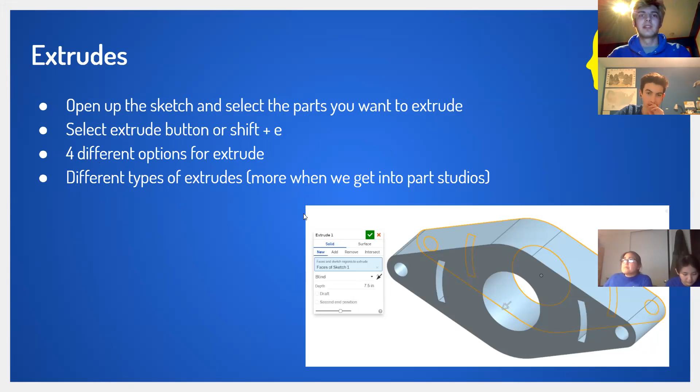So extrudes are pretty much how you turn a sketch from 2D into 3D, and it just makes it wider. That's about it. To make an extrude, you're going to open up the sketch and select the parts that you want to extrude, because you don't have to extrude the whole sketch, but I'll show you that in a second. You can select the extrude button or press Shift plus E, and there's 4 different options for the extrude, and different types of extrudes which we can get into more.

There's something in the window. That's okay, so let's make a document. Let's call it Extrudes plus Revolves, Part Studios training.

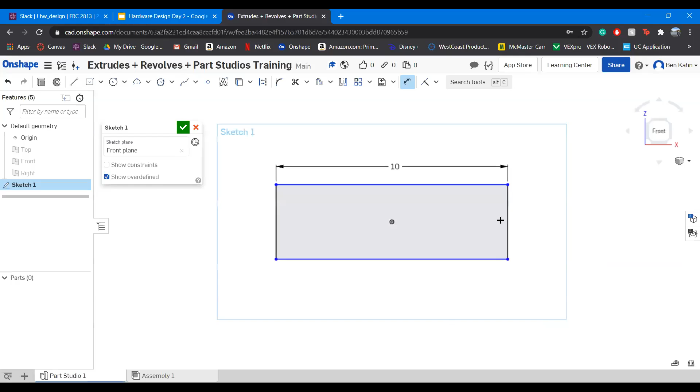So let's say we're making a sketch, and I'm gonna make that smaller so I don't have to have it covered. Let's make a rectangle and then fully define it. Let's say it's 10 by 4, and then maybe we can put a circle in the middle of it that is 3 inches in diameter.

Now that we have this very basic sketch, we can extrude it. I just did Shift E. Now if I wanted, I could also press this extrude button. Since I hadn't manually selected any parts of the sketch, it's going to just extrude what it thinks I want to extrude, which is a rectangle with a hole in it.

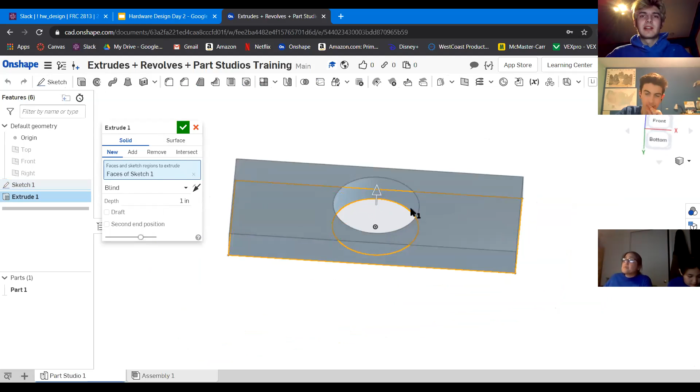So I can use this arrow to increase or decrease the thickness. You can also see the depth here. So let's say I can set this to 3 inches.

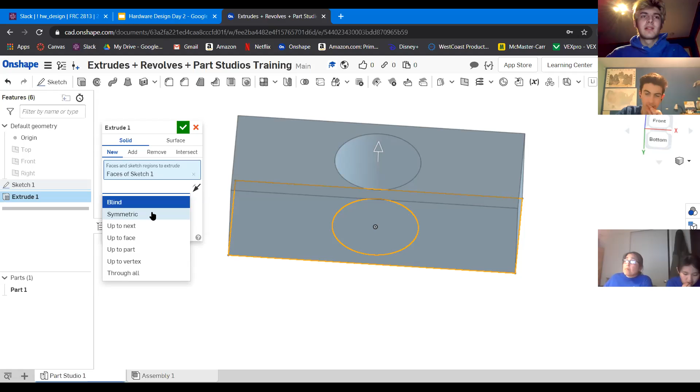And then you can go into this tab, and this can show you all the different types of extrudes that you can do. There's symmetric that you can do without a different relative position, and then up to next, up to face, up to part, up to vertex, and through all are all relative to the part studio, which I can show you. But for now, let's just leave it as blind.

Actually, let's leave it as symmetric. And then you're just going to press check, and your extrude is done.

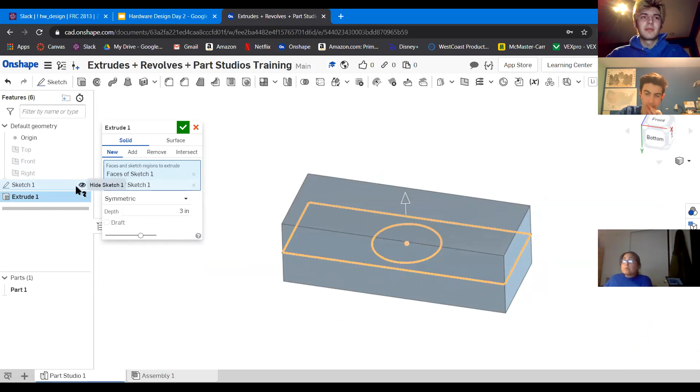Now if I wanted to have this hole filled in, I don't want it to be empty, then I can go into the extrude and change the parts that I'm extruding. Right now I can't change it because actually I can, but a lot of times when this sketch is hidden, which a lot of times it is because it automatically does that sometimes, you won't be able to change anything. So you would unhide the sketch by pressing the little eye button, and then you can deselect and select the parts that you want to extrude, sorry.

Now if I wanted to do this before, I would select that in the sketch. So you highlight the inside parts that you want to extrude, and then you can extrude it, and you can see it does something like that. And I can still make this 3 inches. And I'll change this back to symmetric.

Okay, so you might have also seen that there are these 4 different parts up here. You can have an add function, sorry, you can make a new extrude and you can add to an extrude, or you can remove from an extrude. And this intersect thing, we pretty much never use it, so don't worry about that.

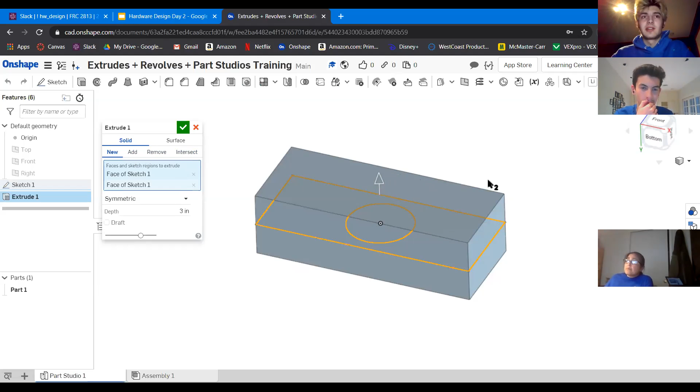So when you add to an extrude, that would be if you extruded another thing off of this, and then it would make it part of it would be the same part, but it would be a separate extrude because it can only go to 1 thickness in an extrude.

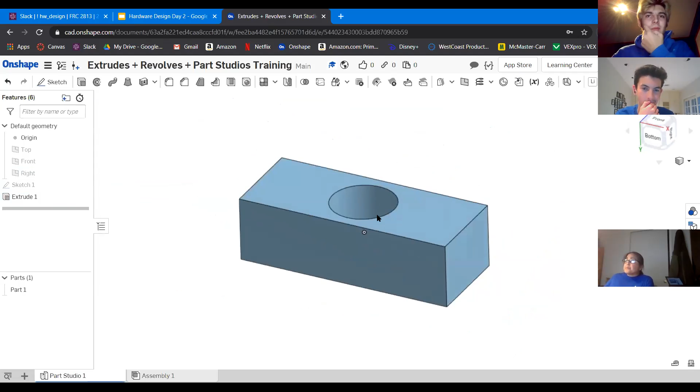I think I saw that there was a chat message. I've never used, yeah, we pretty much never use intersect. I think I learned how to do it like once and then it never worked out again. I'll just like that because I like it with the hole. Okay, cool.

Next up we have revolves. You guys care if I do this full screen? All right, so they're similar to extrudes, but the dimensions are in degrees instead of inches. It makes it go around instead of out. So you pretty much just select a face and you'll revolve around the axis.

So let's do one of those. Let's delete these. Start sketch. Oh, this is ugly.

Let's do a sphere like I had in the slides. Let's make that 6 inches, and put a vertical line down the middle.

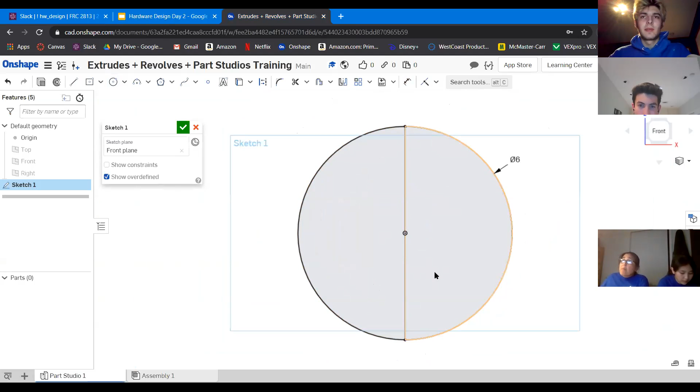Here's a trick I didn't show you last time: you can actually trim parts of the geometry with this tool, trim, which is also the M key. You can just take that off. It doesn't delete the whole circle, but just deletes the part segmented by this line, taking out parts segmented by points that occur at the end of this line. So now we have this half circle of diameter 6.

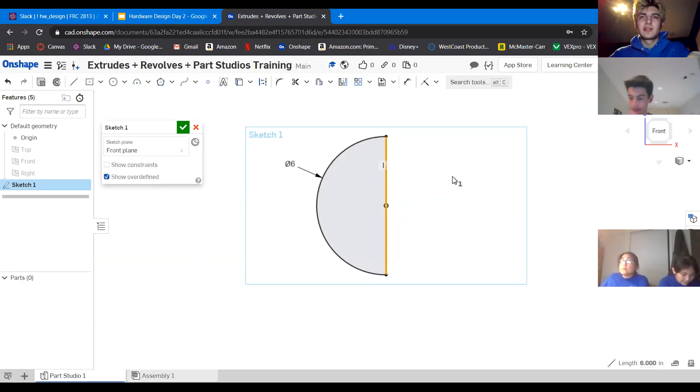And then if we want to do a revolve, there's no hotkey for it, which makes me sad, so you have to go over here and click it. It gives me an error, some red, saying I haven't told it which axis to revolve around. I've selected this face, but there's no axis, so I want to click on this box right here and select the axis I want to revolve around, which is that one right there. And it makes a sphere.

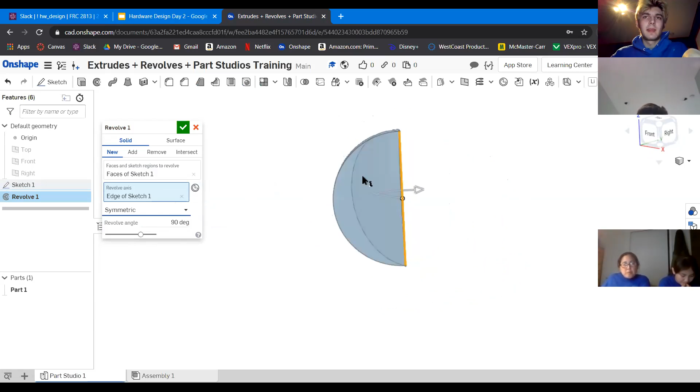But that's only because it's a full extrude right now. If I wanted it to be partial, to do it in one direction, I can change the number of degrees. So I can make it 90, or I can make it symmetric, which just means it's going to go an equal amount of degrees in both directions. There are different uses for this, mostly when you're making a part studio and you want the extrude to be different.

And then there's 2 directions, which also works for the extrude. I don't think I showed you 2 directions on the extrude, but it works the same way - you're actually going to select 2 revolve angles. So I can decrease this side, it stays the same. I have to change 2 different angles to make the shape.

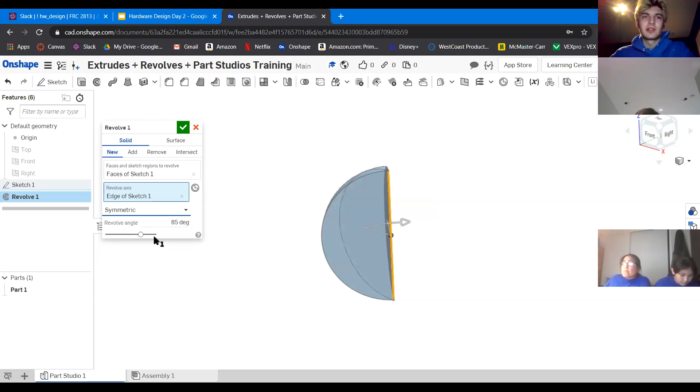But for now, let's just keep this symmetric at 90 degrees. Cool. So now we have like a quarter of a sphere that we've made with a revolve feature.

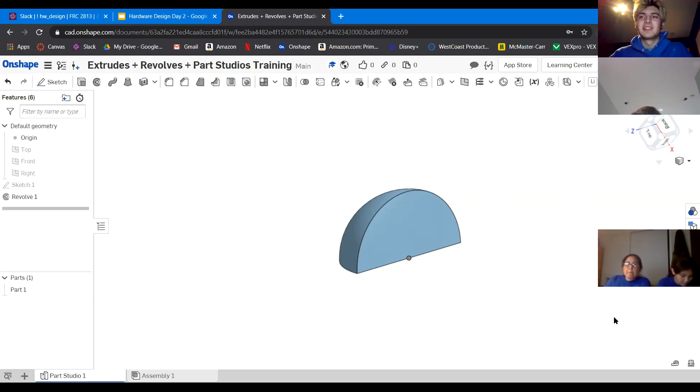All right, let's go back. So there are some tools you can use on extruded features that are already made that'll change the 3D shape of the extrude. So there's shells, which are going to clear out an area inside the extrusion to a specified thickness.

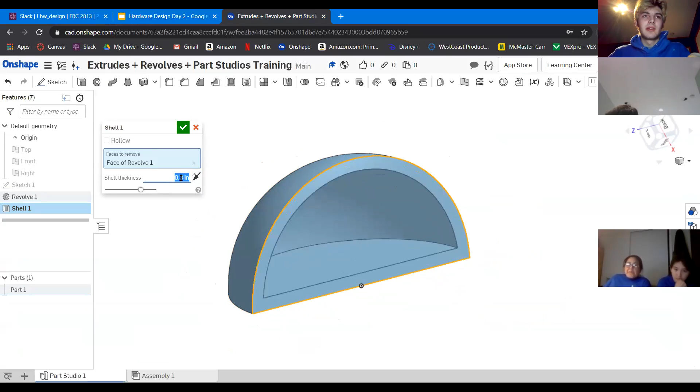So I'm going to select shell, and then faces to remove. I want to do this one. And then shell thickness, I can make bigger or smaller, just like that.

And then if I make it hollow, it actually closes this face, but the inside is still empty. So like if I did - and I haven't taught you guys this yet - a section view, and took away some of the part and hid some of the part, then it would be empty on the inside.

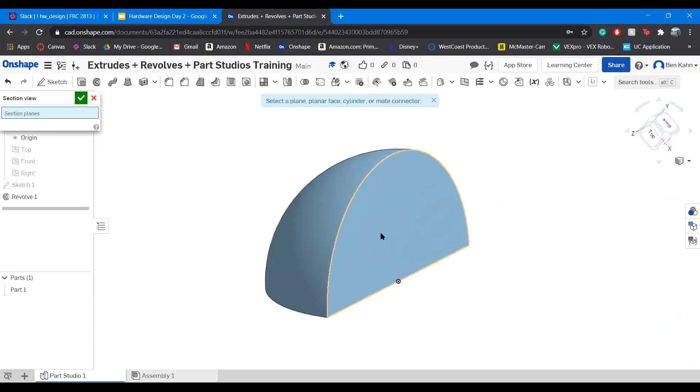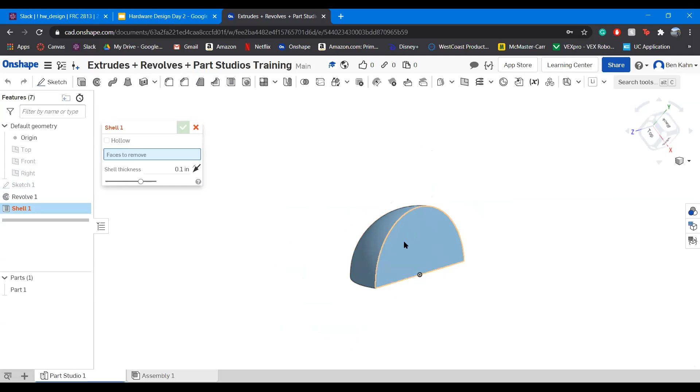Why doesn't that work? That should be here. Section view, why didn't I see that? Nice, it's acting weird, but it's fine. I'll turn this off. Oh, that's because I didn't have the shell applied. Yeah, I undid my shell.

So I'll make it hollow, hollow this part, check. Then turn on the section view. And it's in degrees for whatever reason, but that's okay. But you can see that when it's sectioned, the part is actually hollow - there's nothing inside. So the shell worked. Delete that.

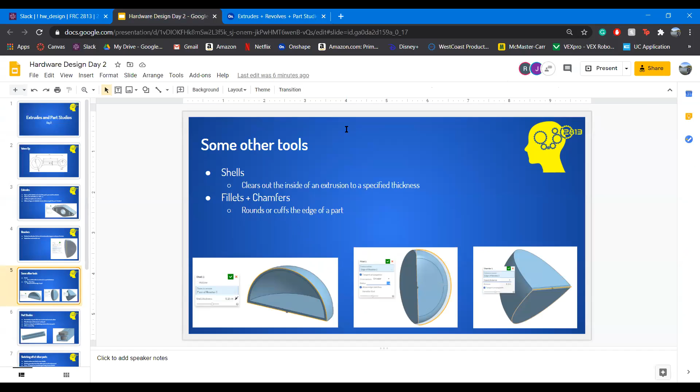There's also fillets and chamfers. It looks like it's spelled 'fillet' if you've ever taken French, and normally I would tell you to call it that because it annoys Kyle. But since he's not here, I'm just going to call it a fillet. And there's chamfers, which are very similar. I'll show you guys how to do that.

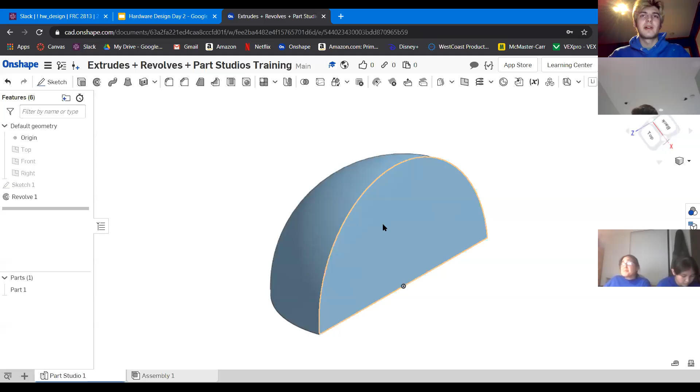So for a fillet, I've forgotten where the part is, but I usually just press Shift F. And I think it's this one, right? And then you're going to want to select the edges that you want to round, so like this one - I think it is loading.

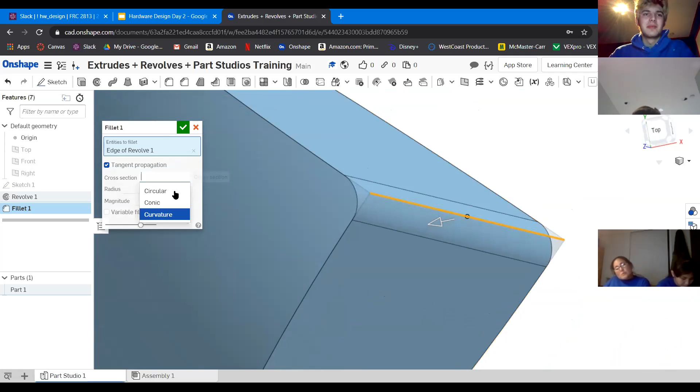You can see right here that it's rounded off the edge, and it's a circular cross section. So I can make it conic, or I can just make it curvature. We pretty much always use circular, but to understand what it means when it says circular fillet, just imagine you're taking a circle of the radius that you specify, and I can make it bigger or smaller, and you're making it tangent to these two lines, and then you're just cutting off everything outside of that. That's what the fillet is.

This whole tangent propagation thing you don't need to worry about, but that's pretty much what that looks like. A lot of times we'll do that to edges to make them rounded, which you want to do a lot because on CNC parts you can't really have sharp edges, so you're going to want to fillet it so that it can move in a curve instead.

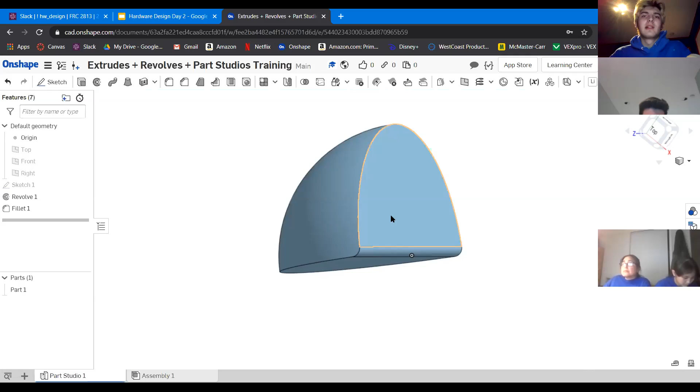A chamfer is similar, but instead of a curved edge, things tend to look better with fillets too. So instead of a curved edge, it's a flat edge. If I select this, it's just like that, a flat edge. There's a lot of different things you can edit it with, like I can change how long each of these distances are, or I can do it like a distance and a certain angle. Anything to really just make the fabrication team have a harder time doing it is all really fun, but usually we just keep it equal distance.

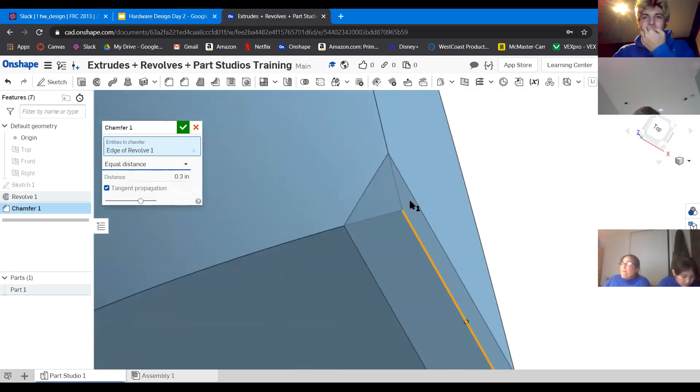So it's pretty simple. But if Caleb comes up to you and says give me a challenge, I want to make something look hard, then you can mess around with those and he'll be working on it for a while. So you guys can see how we did the chamfer right there.

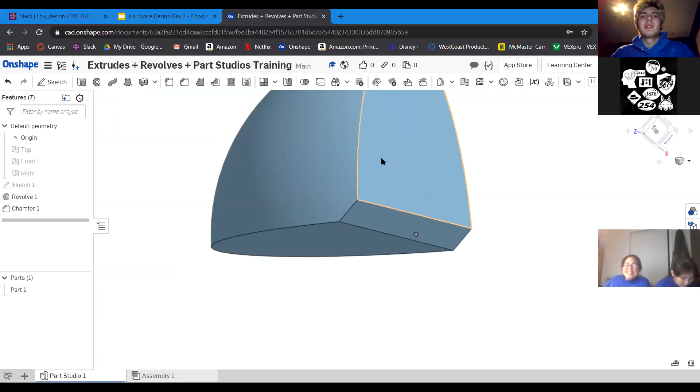Does anyone not understand it? Or does anyone want me to go over it again? Okay, you're still trying. Is everyone following along with this? Cool, that's great. Should I give you a minute to finish up, or should we move on? I think I'm going to keep going.

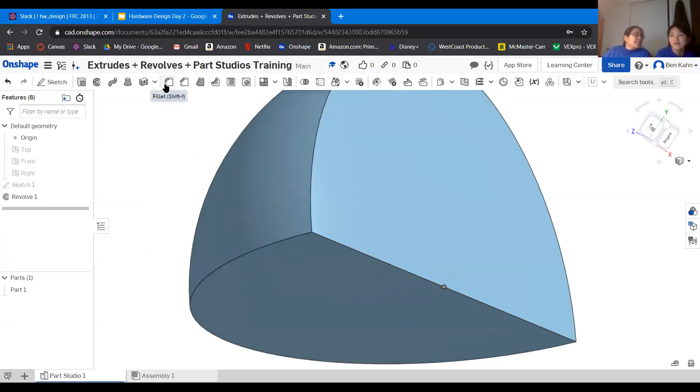A fillet or a chamfer is something to round off or dull this edge right here. It can actually be done on any of the edges, but I just wanted to do it on a flat edge to make it seem simpler. So I'll select the fillet tool. This is when I'm out of the sketch and I've already made my 3D part, and I'm going to go into entities to fillet. I can select that, I can even select this or this, but for now I'll just keep it to this because I want to round this edge.

So I'll call it circular. And when I increase the radius, the curve gets bigger, and when I decrease the radius, it gets smaller. Does that make sense now? Okay, cool. And it's the same thing with chamfers, you're just going to do it, except it's going to be flat instead of curved.

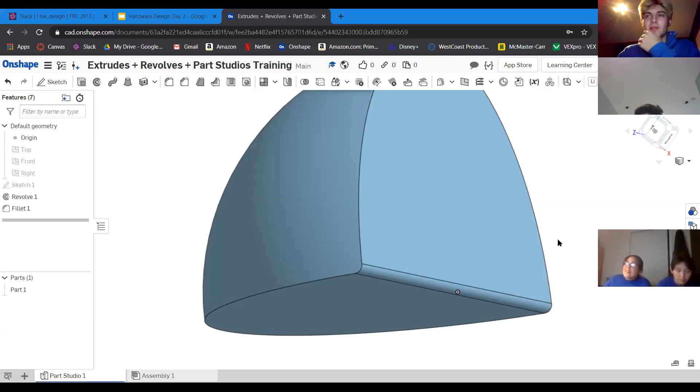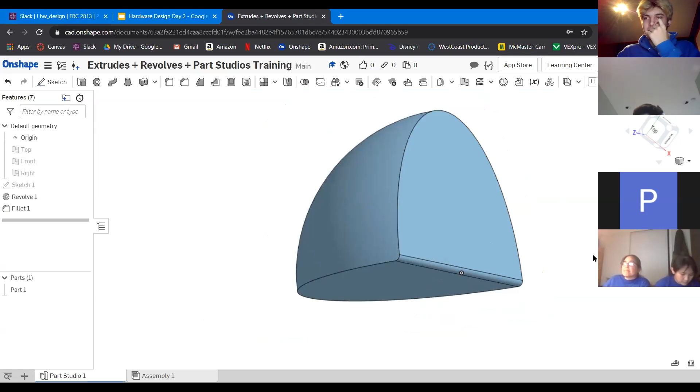Are you comfortable sharing your screen now and showing us what you're working on? If not, that's fine. How about Pranesh, do you want to show us your thing? Well, my Onshape thing's on a different computer, I could use my camera. Okay. Caleb, I'll show how to use fillets in the robot CAD later when we do the demonstration. Do you want to do that, actually? I'll stop the share so that people can pin your screen or something.

Okay wait, so what do I do, you have it on a different laptop? Yeah, on a different computer. Oh, okay, it might not work so well then. Yeah, I could bring it up on this right now. Anyone else? So I know Marcus was able to share with us last time, so I kind of wanted to get someone else. How about Joe, I haven't heard from you today, do you want to show us what you're doing with fillets and chamfers? Okay, that's fine.

What about Ashton? I would love to, except I got really lost and I'm trying to figure out how. I tried to make a circle, a sphere, and now I have a trumpet thing, so now I'm really confused. Trumpet thing. Okay, I'm not sure how you got to that, but I can show you how to make the sphere again.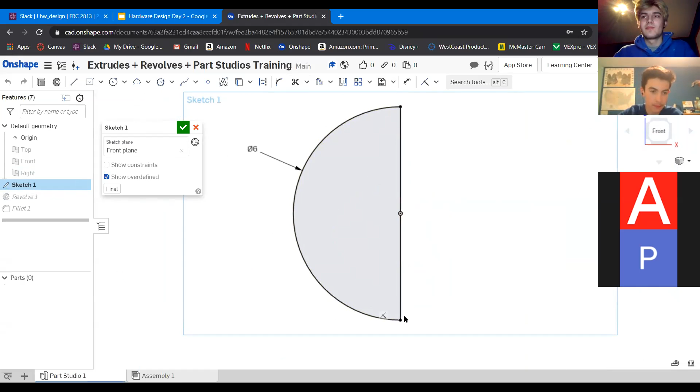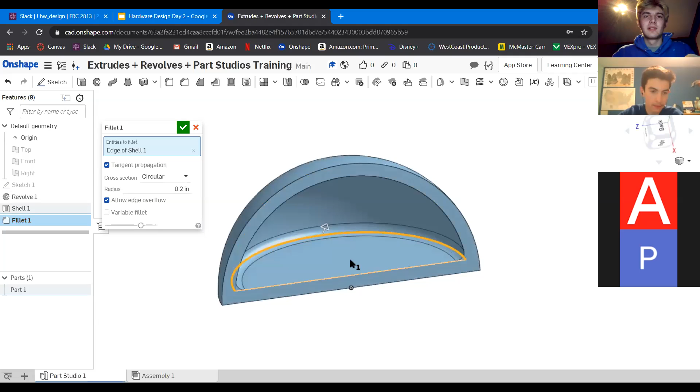And then when you go into the revolve, you just choose the face that you want to revolve, and then you choose the revolve axis, and then the type of revolve that you want to do. And then you can mix up all these things and make it really cool. So if I want to put a shell here, and then maybe I want to do like a fillet in here, that would be pretty cool, I think. So these are just the kind of things you can do when you have 3D parts.

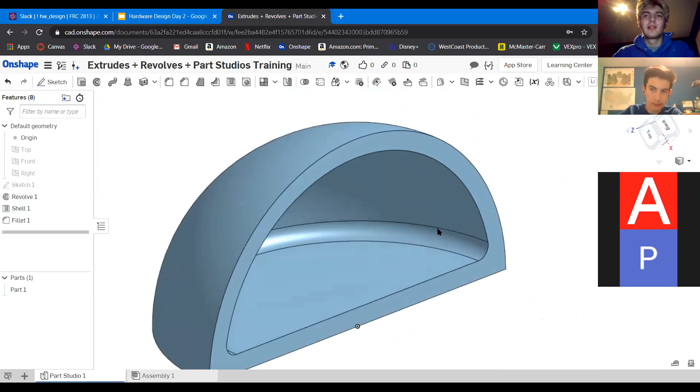All right. Ashton, are you able to do it now? Are you able to like... I'm trying. Okay, it's kind of awkward because I don't own the computer, so the settings are all messed up and funky. I see. Everything's backwards. Mm-hmm, it's crazy. Cool.

Daphne, I know can't use her mic, but I'm not sure if she can screen share. I don't know, can you, or do you want to? Daphne, you can put it in the chat if you'd like. Using a different monitor too. Yeah, that's fine. I guess we'll keep the stuff to my screen then.

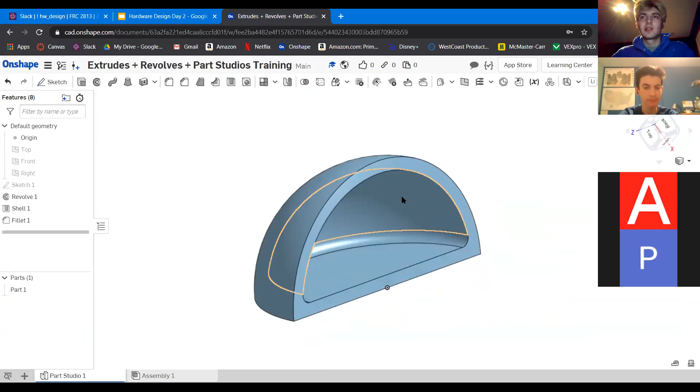All right, we can work on this a little bit more later. I think I want to move on and talk about some part studios now.

And a part studio should only contain one of each part. So in an assembly, you can take the different parts, make multiple of them, and then put them around the assembly. But in the part studio, you only want to make one of them to make sure that it's organized. That's what I was looking for.

Yeah. So part studios are kind of a new concept if you've done other CAD stuff before, like SolidWorks or Fusion 360—I don't think they have part studios. So you pretty much just design each part in a separate thing, and you can sort of do it with multi-part modeling, but it doesn't really work the same as Onshape. But it's great because you can model stuff together really easily, and I like it.

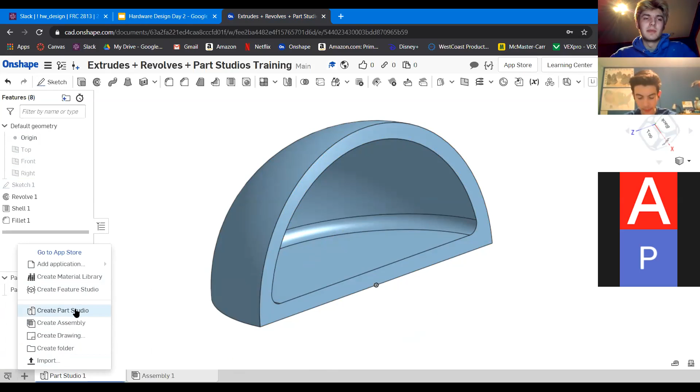And then you can actually rename these. I'll rename this to Part Studio Tutorial.

If I wanted to make a part, or actually two parts that are modeled off of each other, I would start by modeling the first one. Let's make it a rectangle with holes in it. Classic.

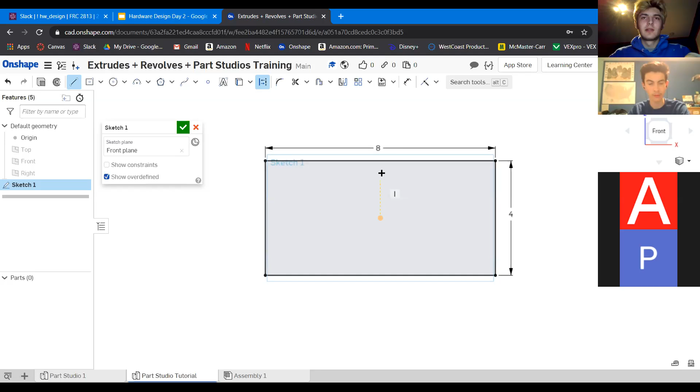Let's put some mirror lines here, and then put 1, 2 circles here and make these equal. Dimension them, say 2 inches apart, and then 1 inch down, and maybe call it 0.75 from the edge.

These are still not right, oh I didn't... let's make these a 1/4 inch, which is very small compared to the size of them. And then we can mirror these across these two lines.

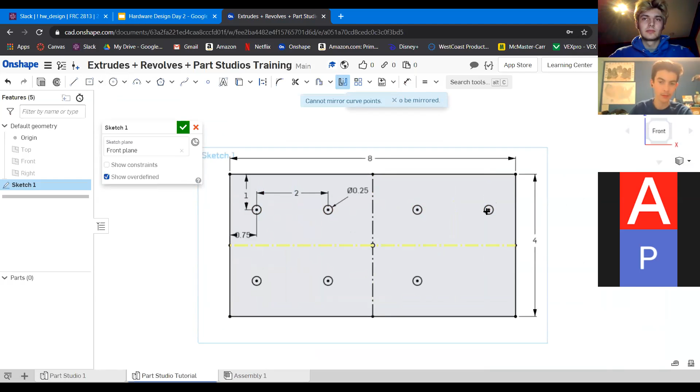Okay, so now if we go to extrude it, let's call it 2 inches and make it symmetric. Yes. And we have that.

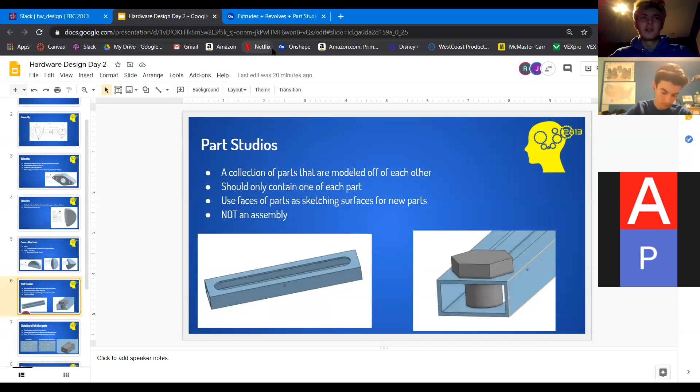So we wanted to make another part, and I guess we'll just do this slot, this bolt thing again, or a semi-bolt. To make a sketch based off of this part, you click on the surface and then make the new sketch. If you press the normal key, it'll actually put your normal to this part. So I'll just do it right here.

Let's make it like a hex bolt or something. You can model off of these holes or sides from the first part studio, but you can't use them unless you do a very specific thing that I'll show you in a bit.

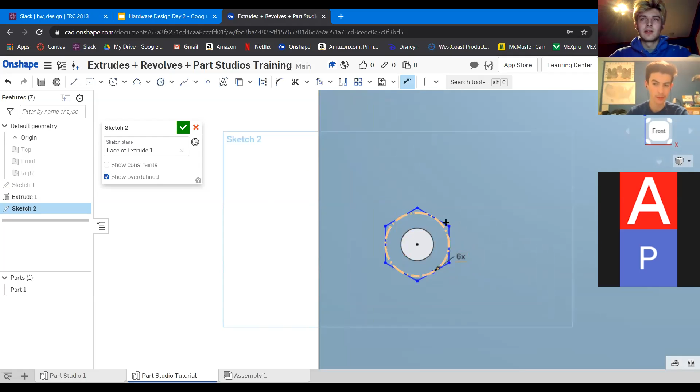And call these vertical, and make this 0.5.

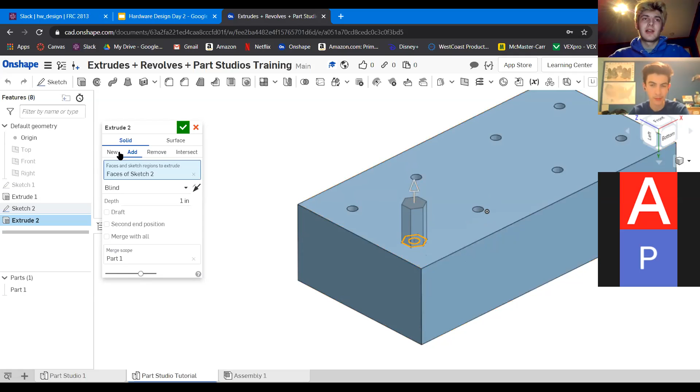Okay, and then if I wanted to extrude this, it's going to automatically select add as the extrude option because it's off of this face. Now if I wanted these to be 2 separate parts, I would click new instead, and it'll change the color. And I can make this like 0.5 inches.

So I have that now. If I wanted, actually I think this part is on the next slide. If I want to sketch off of other parts, like I just did, you can also use the U key to select geometry and then make that a part of the new sketch.

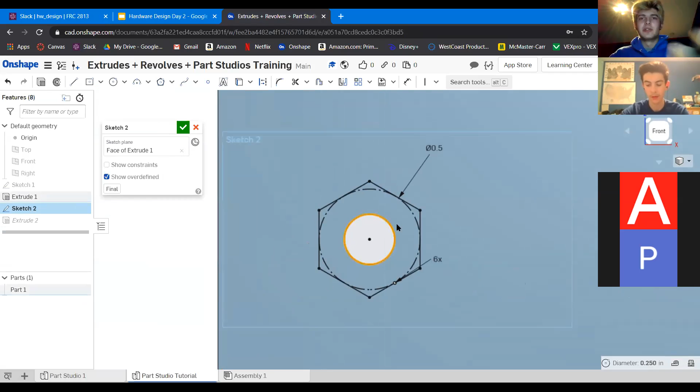So if I go back into this sketch and I want to select this circle and I press U, that's going to be a part of the sketch. You may not have noticed it because it didn't really change in color or anything, but it's like inserting this circle into the sketch when it could only be referenced off of last time. So now it's going to have a hole in it because that's what OnShape thinks I want to do.

Now if I went into the extrude and I selected this hole, it could fill it up, or I could undo it. But I have that option now because it's part of the sketch and I did the use key. Does everyone understand how to do that?

I don't know if I told you, that was the U. It's called the use tool, but it's the U key that I'm pressing. I don't know if I mixed those up.

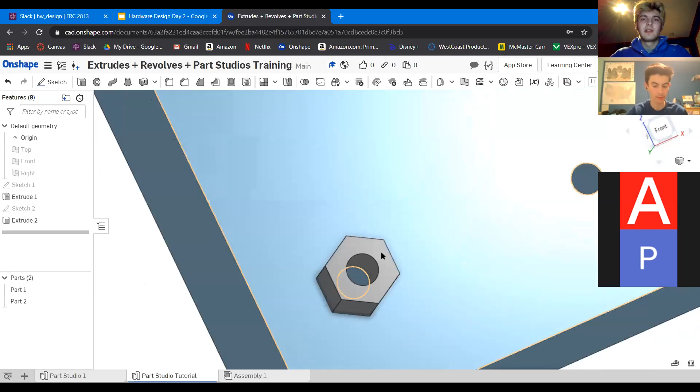But yeah, you can see how these parts are modeled. And if I wanted one of these for each separate hole, I wouldn't make one for each hole. I would only make one and then put it in the assembly 8 times. Right? Does everyone get that? Okay.

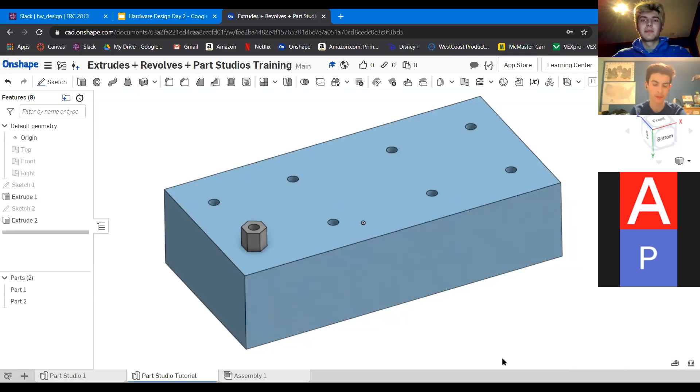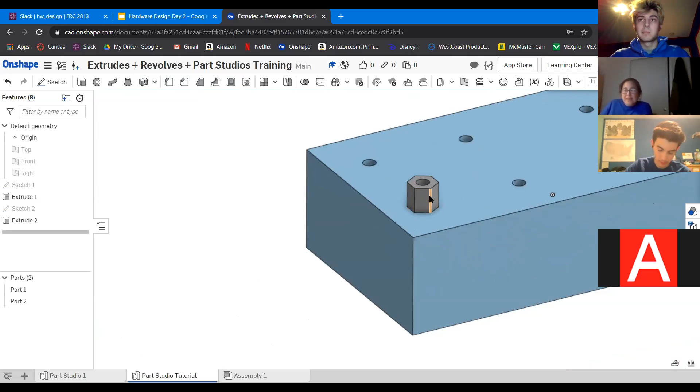Really quick, Ben, just to understand what you would use that block for—is this part of a larger picture, or are these modules of the robot? Oh, this block specifically isn't anything, it's just a random part. No, I wasn't actually making a robot part, but this is kind of just an example of something that's modeled off of another part. We're gonna do robot parts today though, so you'd need to use these to make other similar parts that are actually robot parts. Awesome, yeah, okay.

So let's do a quiz. What's wrong with this part studio? What could I change about it that would make it right? You guys want to unmute or put it in the chat?

So part studios are a collection of parts that are modeled off of each other. It's just a bunch of parts, and it should only contain one of each part. That was kind of the hint for the thing.

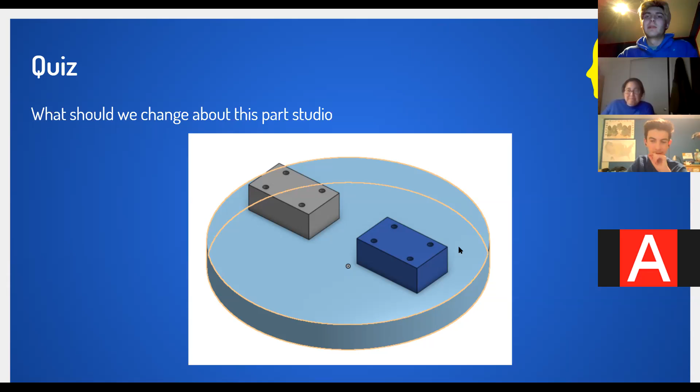Ashton, I saw you said there's no dimensions or references. Yeah, I guess there aren't any, but you don't really need any because these are two of the same part, which is what Marcus said. So the blocks are duplicated, and this is a part studio. You only want one of these, and then you're going to make another one when you put it into an assembly.

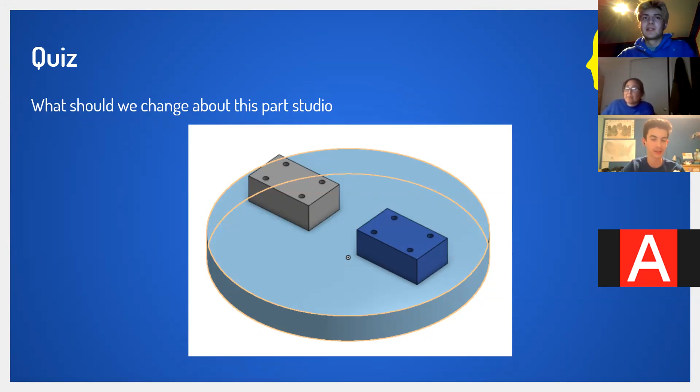A quick thing: you don't usually use dimensions and references outside of a sketch. So notice after it's extruded, you're not going to be able to see the dimensions unless you go back into the sketch. Yeah, that's true.

Are you guys all ready for the demonstration/project thing that we're going to be working on for the next few classes? I'll take that as a yes. Hopefully, yeah, I think you guys will be prepared.

We're not going to be doing all of this today, so you don't need to put in all these different parts or do the gearboxes yet, but we are going to be doing these tubes, the gussets, and the belly pan, and probably not the pattern part in the belly pan because that makes my computer lag and I don't want to be hosting a Zoom meeting while doing that.

Let's put this into demonstrations and then we'll make a document, and we'll call it training drive train model. Create a public document. Fun. Okay.

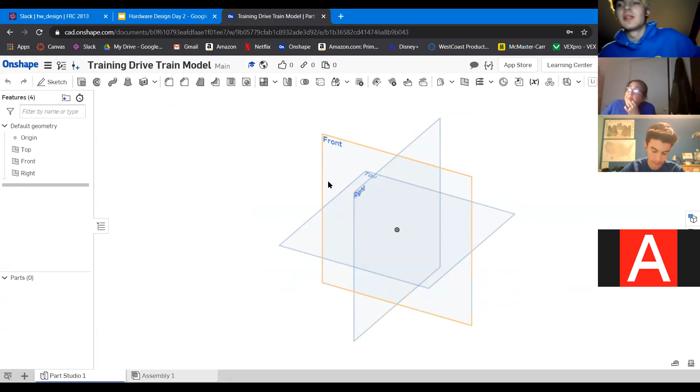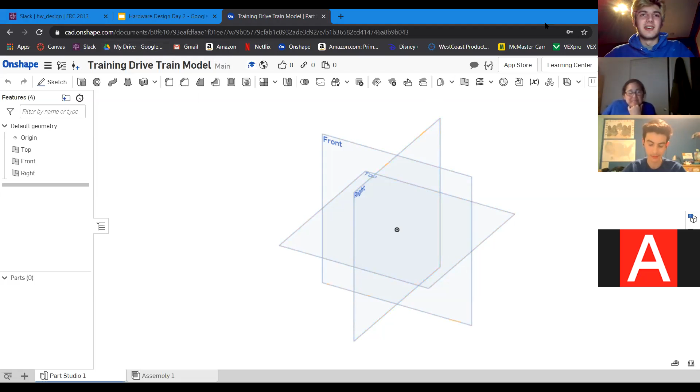This is kind of pretty important. So if you guys are still here—you might have to leave soon because I have an incredible amount of homework. Yeah, don't we all? But that's fine, Ashton. Yeah, that's fine, but we'll have this on video, so it should be fine.

Okay, so we're going to make a sketch on the top plane to start it off. And then we're going to make some rectangles to be the tubes for the tubing. And we'll just put these all together.

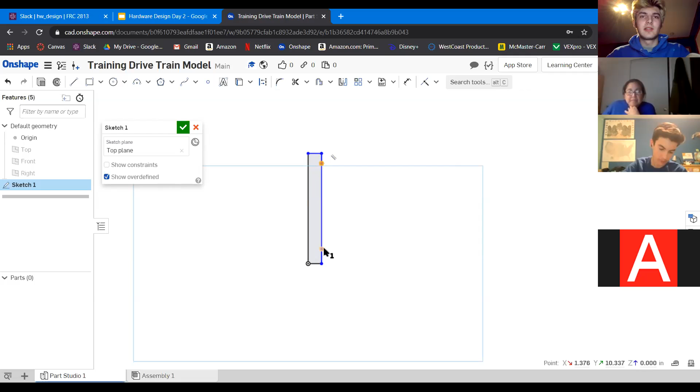And I know you said you shouldn't have multiple parts that are the same in the same sketch, but these—I did this wrong—but these are different because they could have holes in them that are different on different sides when they're attached to different things. So they look the same now.

I'm just going to restart this, I didn't do this right. They look the same now, but when you get into more complex robot CAD, it's going to start being different because you're going to want to have different things attached to it. So that gives it holes.

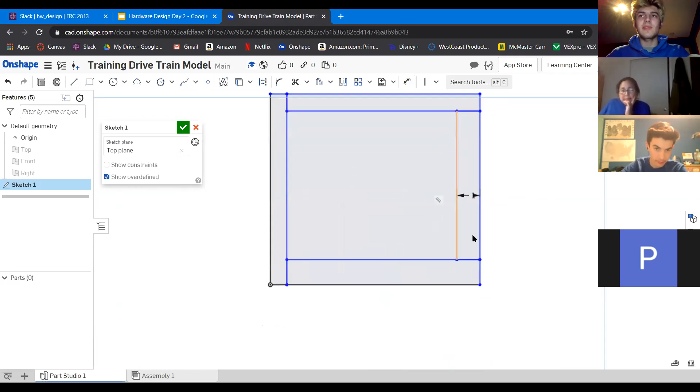I'll make these vertical, and then one more right here. I want all these dimensions to be 2. Yeah, okay, bye Ashton. Sorry, no, we want this to be 1. And then we'll extrude them to 2.

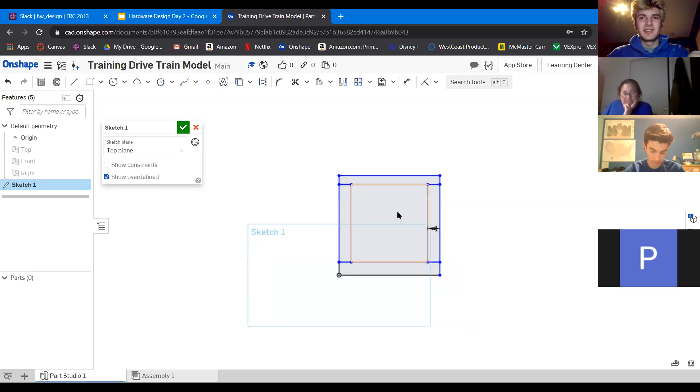Did I do this wrong again? Oh my god, wait, let me just delete this rectangle. And then move this over. Right, we want these on the inside and these on the outside. Okay, I don't know, I'm not thinking clearly right now. I don't know why, I'll just make this one.

And I could put, what do I call it, construction lines and make them all equal. But then I'd have to dimension them all to be constructed and stuff. That's kind of not what I want to do right now.

So let's make these—let's make this, actually not that part, but this dimension right here, we can call this 22. And this dimension right here, we can call it 24. No, this one's 26. Okay, this is still not defined.

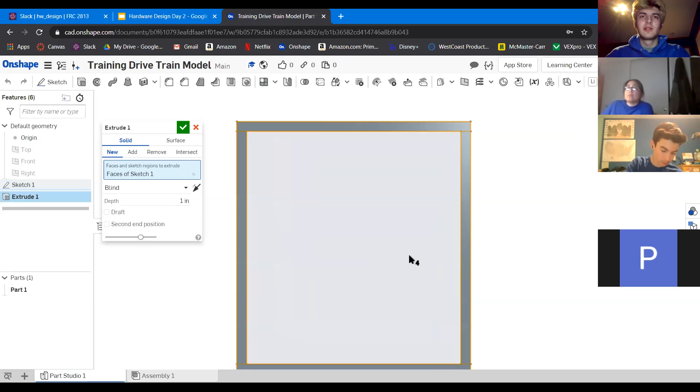I want these to lock up there. Cool, so now when we extrude it, it's going to make 4 different—actually no it won't—but we're going to want to select 1 and extrude it to 2 inches. And we're going to want to do this for all of them because we want 4 different parts.

This seems to be new instead of add.

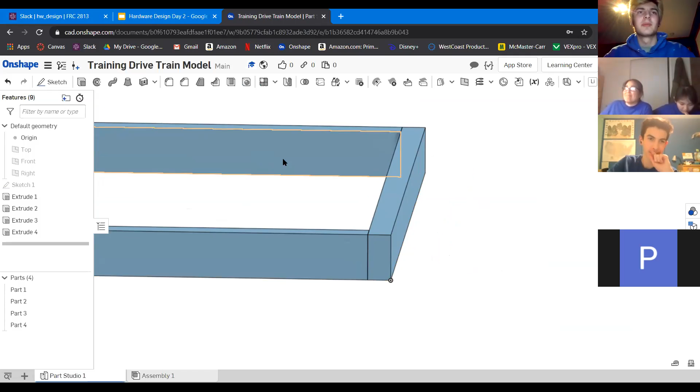Okay, we're going to use our shell feature and just push through this. We'll call this 1/16 of an inch. We also want this one to be the same shell amount. Then we'll do a different shell—we'll hide those two parts, and we're going to shell these to only 1/8 inch.

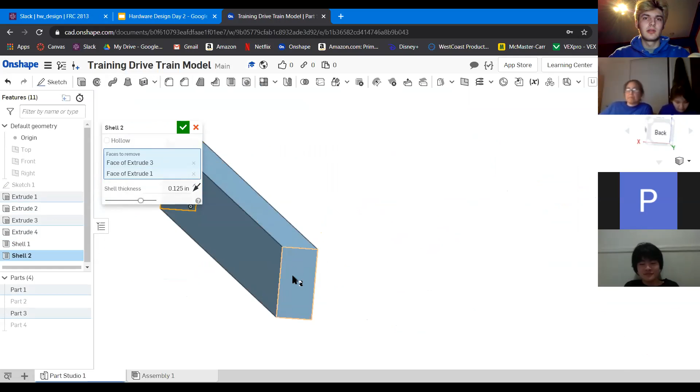Because these need to be thicker so that they can hold the different parts. Show all parts—does this go all the way through? It doesn't. I didn't select the other side, please.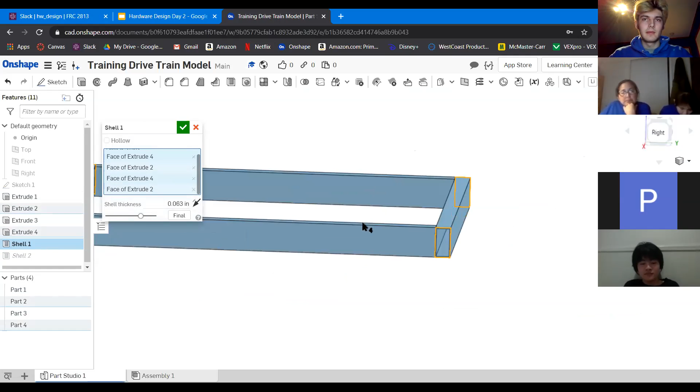Okay, the next thing we're going to want to do is make a sketch on here that's going to put holes all along this row. We'll make this centered and call it 0.191, which is the dimension for a very common bolt that we use. We'll put this 1/2 inch on the side, and then we're going to pattern it.

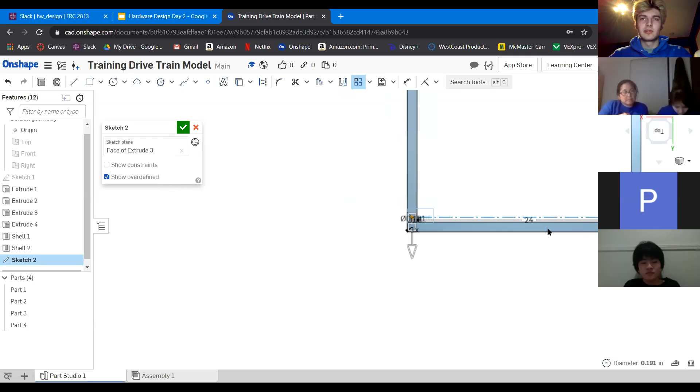Linear pattern, not in that direction. Make this 2, and then the distance is going to be like 24. That's a little far. 23... right on, okay.

And then in this direction, we'll make it like, I don't know, 40—as many as it takes to get to the end. We want this to be 1/2 inch because that's the hole pattern that we use. It looks like we need a few more. Let's call it 48. Okay, 47.

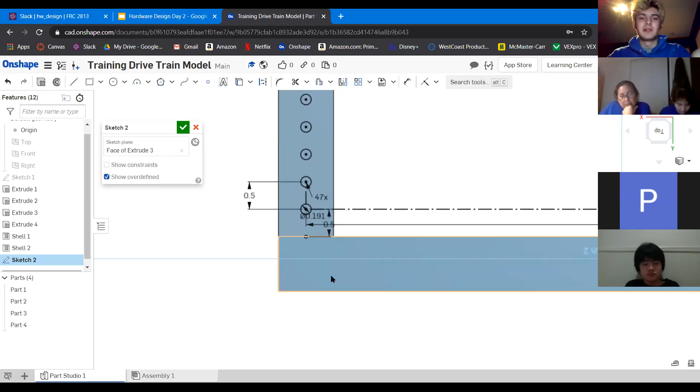Right, those holes. And then we can also do a hole pattern here. The reason why we do these hole patterns in a separate sketch instead of just in these sketches is because when you make these in the original sketch and do the shell, it puts shells around each individual hole, which is very annoying, and you have to go in and shell each hole as you go. So we're just doing this separately to make it a little easier for ourselves.

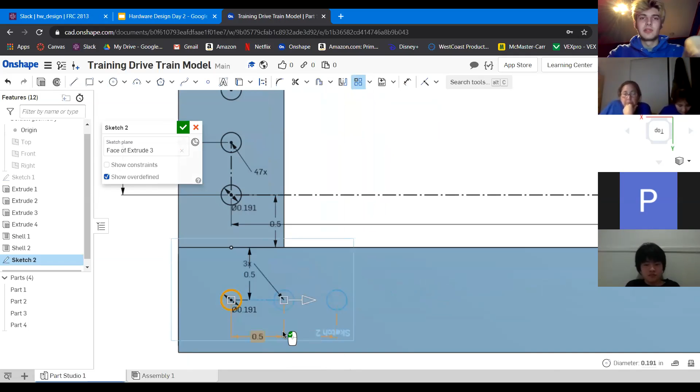Call this 0.5, and then we're going to do the same sketch pattern except in the other direction. It's going to be 0.5 again, and then this is... same, right? There it is. Okay, then this one.

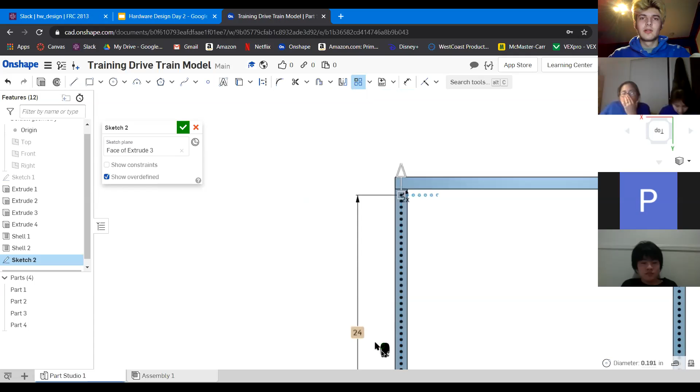This needs to be—what did we make it? 26? No, okay, 24 is how far it's going to go. Where did that dimension go? Here. Okay, and then all the holes are there.

Select that and then go into the remove function. Please go in the other direction. Oh, and this is merge scope, which is another thing I think I kind of missed. Merge scope in a part studio is essentially telling you which parts the extrusion is going to affect. So if I'm doing a remove extrude, it's only going to affect the parts that I put in the merge scope—if a part was being removed through but wasn't part of the merge scope, it wouldn't remove anything from it.

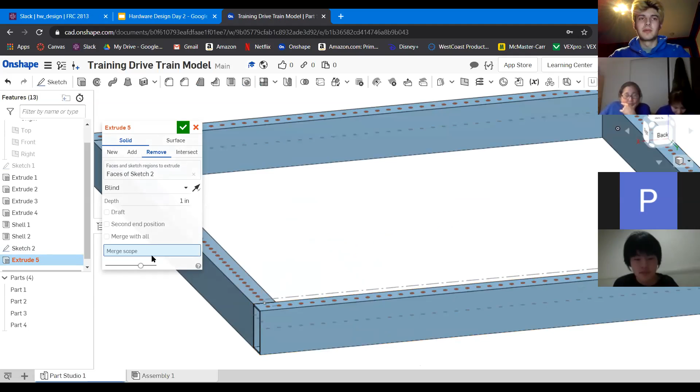So I'm going to select all of these parts as being part of the merge scope, and we'll use through all. There's a chat message—all right, Marcus has to go too. That's fine. And we have our holes.

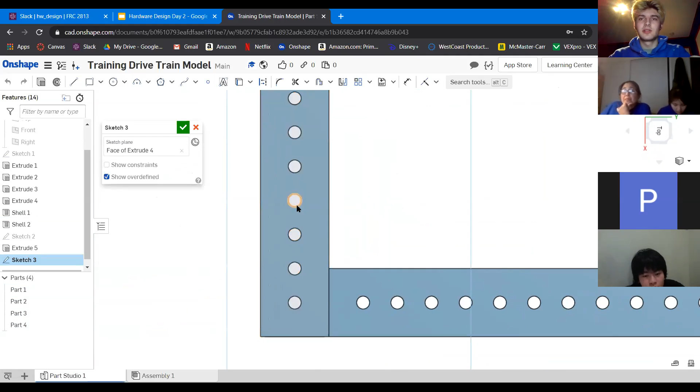I think I'm just going to do the gussets and then call it there. The gussets, which are the things that are going to hold these together—I'm going to want to use these holes here. I'm trying to find the right amount so it's even. I think that's good, so we can use those holes.

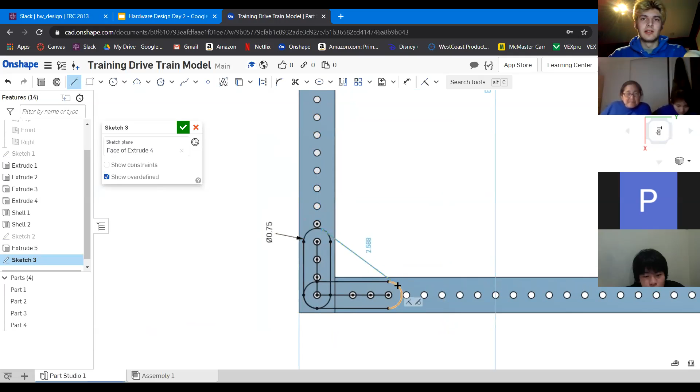I press the L key, and then I can get a line. And I think we talked about the slot feature earlier—this is when you're actually going to use it. It's this thing, and you just select a line and it will move around a hole. So I might want to make this a little thicker. Yeah. Okay, and then I'll put a line that is just like that, and we'll make it tangent to both of these curves that's defined.

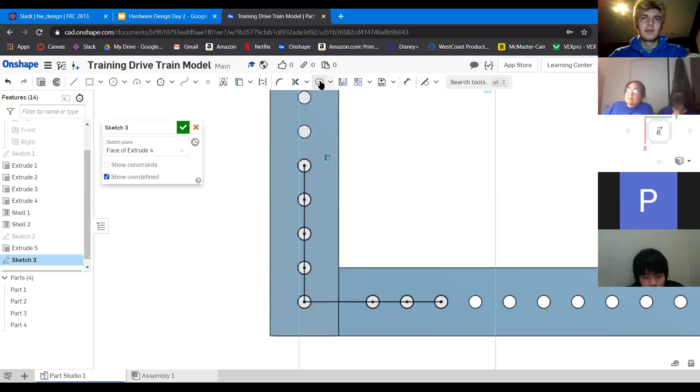And I just realized that this isn't even on both sides. Or—let's get rid of these. And I did not make this line extend to the last hole. Okay, we'll just do this slot again, and then check—line that is tangent to both of these curves so that it encloses.

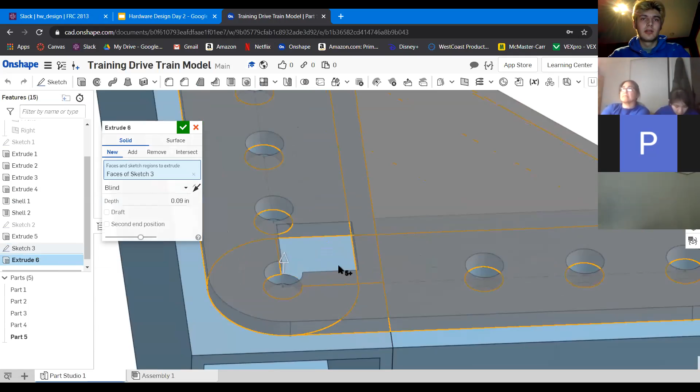And we also, oh, I guess I didn't make this coinciding with it. Okay, now we can extrude this. We want it to be selected as new because it's a new part, and I think it's 0.09—is that right? Yes. And that is the gusset part. Oh, just clear that up. Okay.